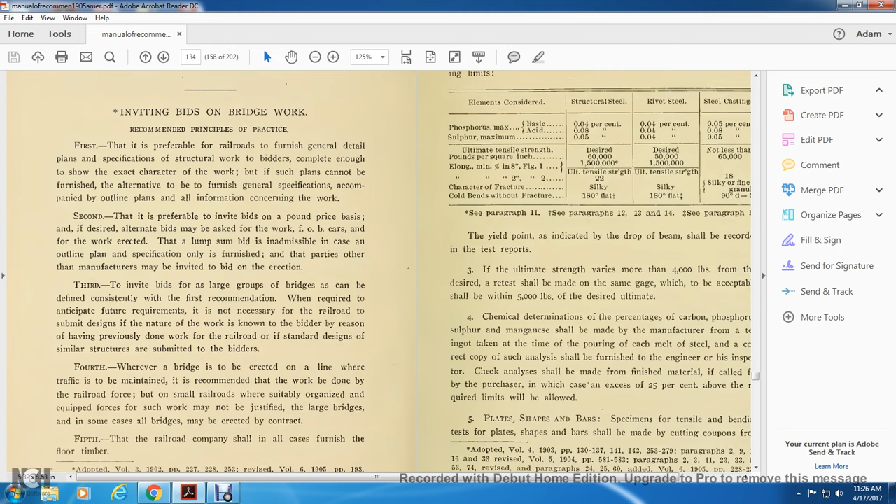Fourth, whenever the bridge is erected on a line where traffic is to be maintained, it is recommended that the work be done by the railroad. However, for small railroads, a suitable organization equipped for such work may not be justified. Large bridges, and in some cases all bridges, may be erected by contract. Fifth, the railroad company shall in all cases furnish the floor timber.

General specification for iron and steel structures: material and workmanship of steel structures. Material. Steel shall be made by the open hearth process, and the chemical and physical properties shall conform with the following limits. Elements considered for structural steel, rivets, and steel castings: phosphorus maximum, sulfur maximum, ultimate tensile strength in pounds per square inch, elongation percentage in 8 inches and 2 inches, character of the fracture, cold bend without fracture.

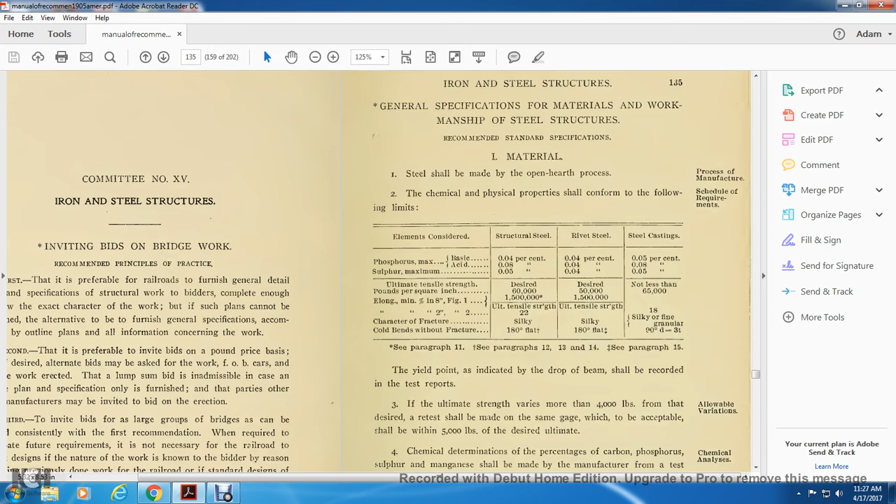The yield point shall be indicated by the drop of the beam, and it shall be recorded in the test reports. If the ultimate strength varies more than 4,000 pounds from the desired result, a retest shall be made with the same gauge, for which the acceptable variation shall be 5,000 pounds from the desired ultimate. The chemical determination of the percentages of carbon, phosphorus, sulfur, and manganese shall be made by the manufacturer from a test ingot taken at the time of pouring of each melt of steel, and a correct copy of such analysis shall be furnished to the engineer or his inspector. Check analyses shall be made from the finished material if called for by the purchaser, in which an excess of 25% above the required limits is allowed.

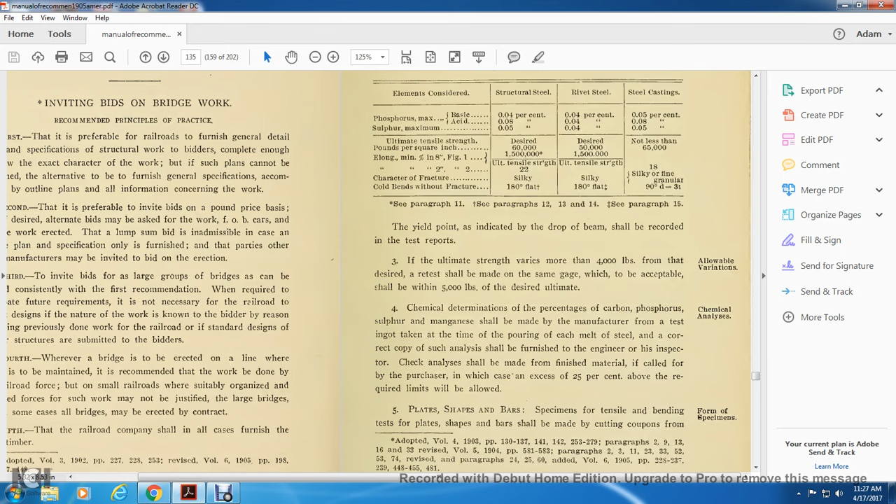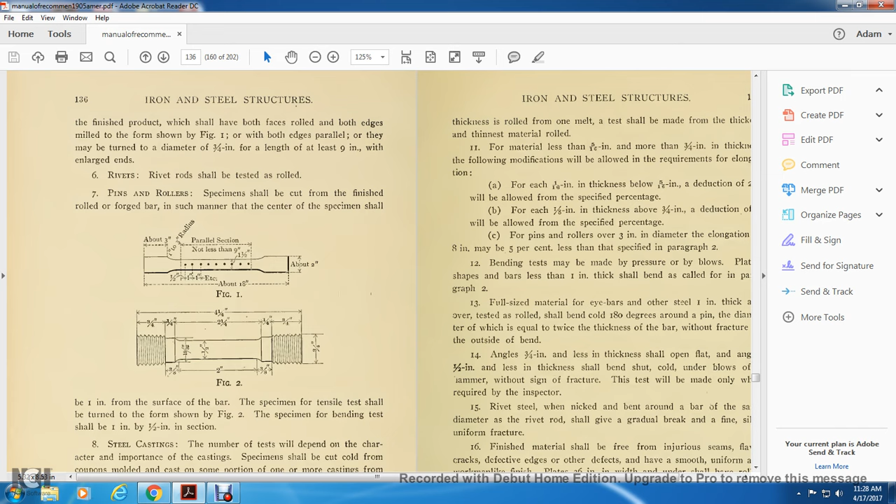Plates, shapes and bars. Specimens for tensile and bending tests for plates, shapes and bars shall be made by cutting coupons from the finished product, which shall have both faces rolled and both edges milled, as shown in figure 1. Bar specimens may be turned to a diameter of 3/4 of an inch for a length of at least 9 inches, with enlarged ends. Rivet rods should be tested as rolled. For pins and rollers, the specimen should be cut from the finished rolled or forged bar in such a manner that the center of the specimen shall be 1 inch from the surface of the bar. The tensile test specimen shall be turned to the form shown in figure 2. The bending test specimen shall be 1 inch by 1/2 inch in section.

Steel castings. The number of tests will depend on the character and importance of the castings. Specimens shall be cut cold from coupons molded and cast on some portion of one or more castings from each melt, or from the sink heads, if the heads are of sufficient size. The coupon or sink head shall remain on the casting until annealed, before cutting off the test specimens, which shall be as prescribed for pins and rollers.

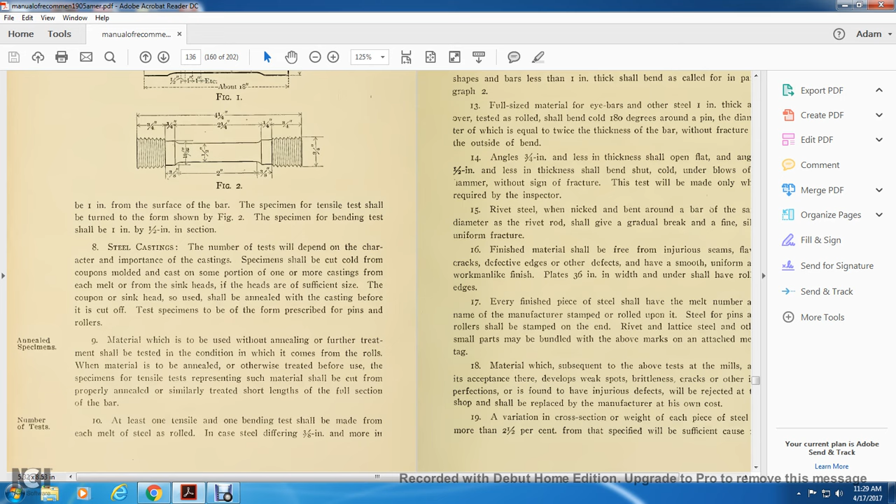Annealed specimens. Material which is to be used without annealing or further treatment should be tested in the condition in which it comes from the rolls. When the material is to be annealed or otherwise treated before use, the specimens for tensile tests representing such material should be cut from properly annealed or similarly treated short lengths of the full section of the bar. Number of tests: at least 1 tensile and 1 bending test shall be made from each melt of steel as rolled, in case the steel differs 3/8 of an inch or more in thickness.

Thickness is rolled. One melt, a test should be made from the thickest and thinnest of material rolled. For material less than 5/16 of an inch and more than 3/4 of an inch in thickness, the following modification will be allowed with requirements of elongation.

For each 1/16 of an inch thickness below 5/16 of an inch, a deduction of 2.5 will be allowed, specified from percentage per inch. For each 1/8 of an inch thickness above 3/4 of an inch, 1 will be allowed for the specified percentage. For pins and rollers over 3 inches in diameter, elongation of 8 inches may be 5% less than specified in paragraph 2.

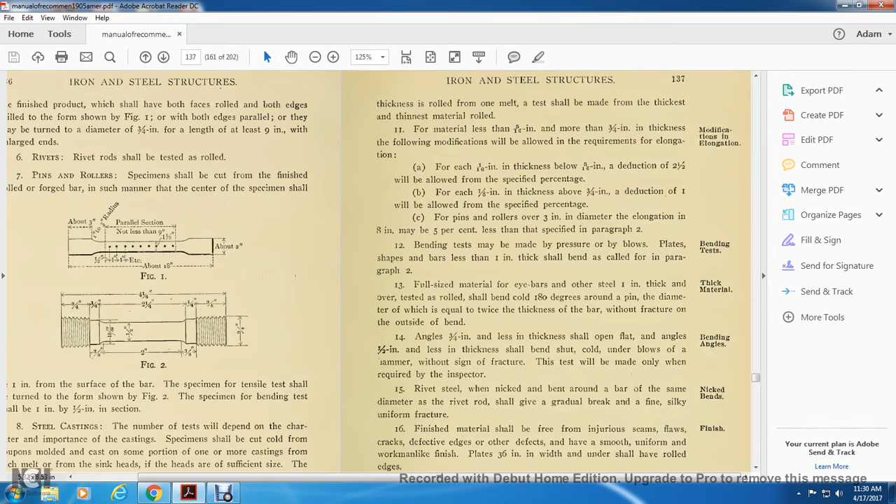Full-size material for eye bars and other steel, 1 inch thick and over, tested rolled, shall be bent 180 degrees around a pin with a diameter equal to twice the thickness of the bar, with no fracture on the outside of the bend.

Angles 3/4 of an inch or less in thickness shall open flat; angles within 1/2 inch of the thickness shall be bent shut cold under the blow of a hammer without sign of fracture. The test will be made only when required by the inspector.

Rivet steel, when nicked and bent around a bar of the same diameter as the rivet rod, shall give a gradual break and show a fine, silky, uniform fracture.

Finished material shall be free from injurious seams, flaws, cracks, and defective edges, or other defects, and shall be smoothly uniform with a workmanlike finish.

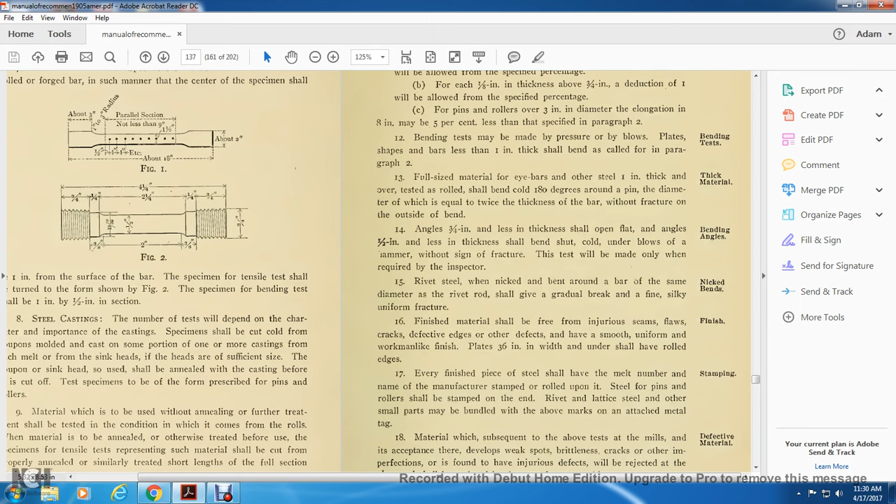But plates 36 inches in width and under shall be rolled with rolled edges.

Stamping: every finished piece of steel shall have the melt number and name of the manufacturer stamped on it or rolled upon it. The ends of pins and rollers should be stamped on the end. Rivets, lattice, and other small parts may be bundled with marks of attachment by metal tag.

Material showing subsequent to the mill tests and acceptance, developed weak spots, brittleness, cracks, or other imperfections found to have injuries or defects, will be rejected at the shop and shall be replaced by the manufacturer at its own cost.

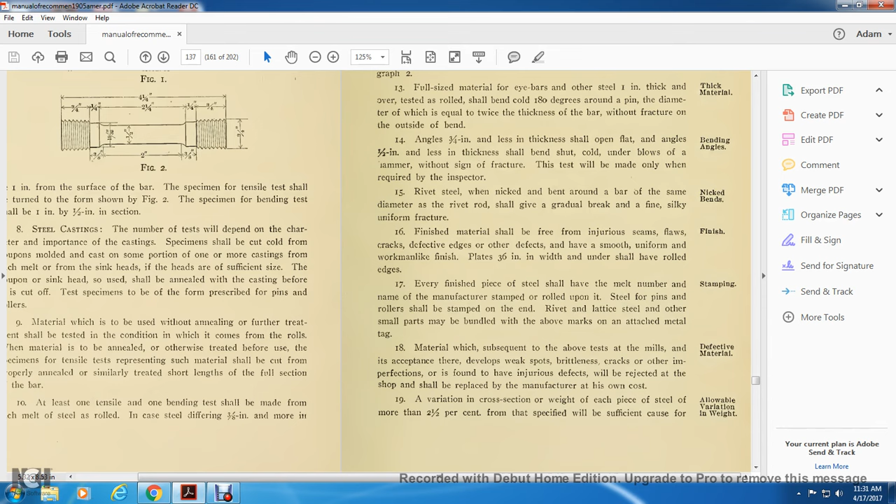A variation in cross-section weight of each piece of steel of more than 2.5% from the specified is sufficient to cause rejection, except in the case of sheared plates, which will be covered by the following permissible variations, which are applied to single plates.

When ordered by weight: plates of 12.5 pounds per square foot or heavier, up to 100 inches wide, 2.5% above and below the prescribed weight; 100 inches wide and over, 5% above or below. Plates under 12.5 pounds per square foot, up to 75 inches wide, 2.5% below; 75 up to 100 inches wide, 5% above or 3% below; 100 inches wide and over, 10% above or 3% below.

When ordered to gauge, plates will be accepted if measured not more than 1/100th of an inch below the ordered thickness, and an excess over the nominal weight corresponding to the dimensions ordered will be allowed to each plate, no more than shown in the following table.

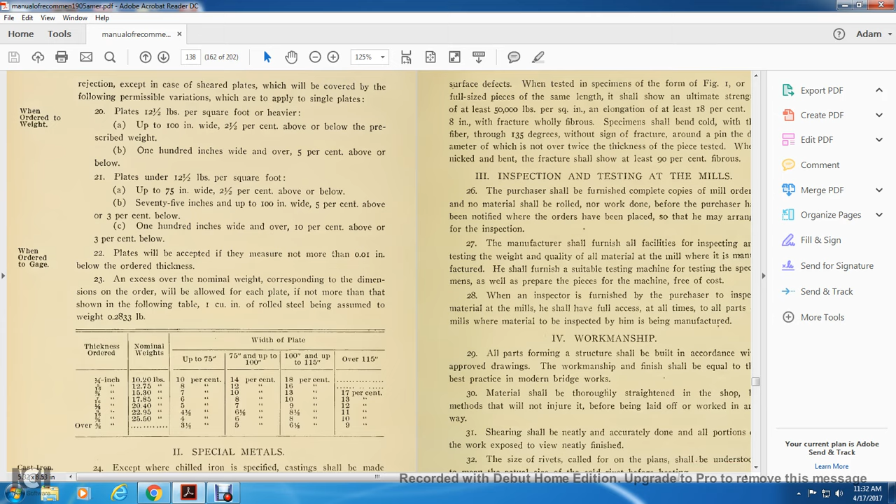One cubic inch of rolled steel may be assumed to weigh 0.2833 pounds. This table shows the thickness ordered, the width, and nominal weights: up to 75 inches, 75 to 100 inches, 100 to 115 inches, and over 115 inches width of plate.

Special metals, cast iron. Except where chilled iron is specified, castings shall be made with tough gray iron, containing not more than 0.10 (one tenth of one percent) combined. They shall be true to pattern, out of wind, and free from flaws.

Except where a shrinkage test is demanded, the test shall be made on an arbitration bar with the American Society for Testing Materials, a round bar of 1 1/4 inch diameter to 15 inches long. The transverse test should be made with a support length of 12 inches, with a load at the middle, with the minimum breaking load applied of 2,900 pounds, and a deflection of at least 1/16 of an inch before rupture.

Wrought iron flat bar. The wrought iron should be doubled and rolled thoroughly, the fibers uniform in character, thoroughly welded and rolled, and free from surface defects.

The test specimen, with a form of nick at one end, full size piece with the same length, shall show an ultimate strength of at least 50,000 pounds per square inch, an elongation of at least 18% in 8 inches, with the fracture wholly fibrous.

The specimen shall be bent cold until the fiber is at 135 degrees without showing sign of fracture, around a pin of diameter not over twice the thickness of the piece tested; when nicked and bent, the fracture must show at least 90% fibrous structure.

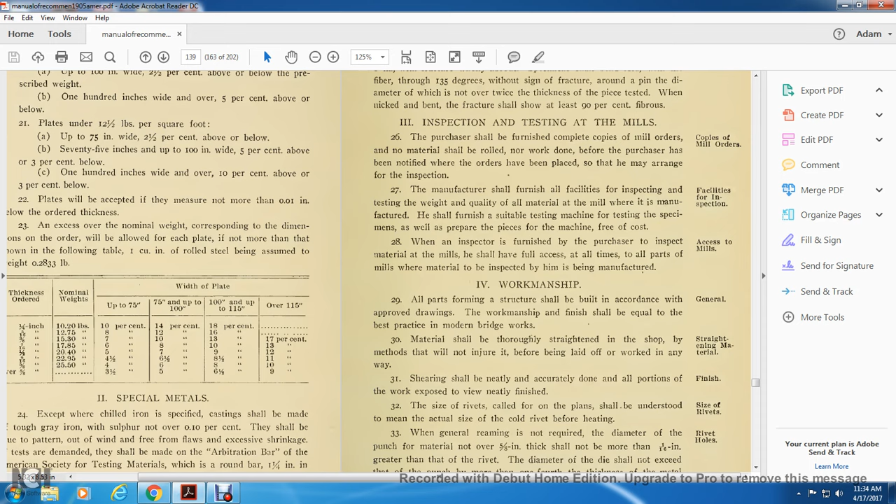They shall furnish suitable testing machines and prepare the test specimens and test pieces free of cost. When an inspector is furnished by the purchaser for inspecting material at the mill, he shall have full access at all times to all parts of the mill where the material is being manufactured.

Workmanship, general. All parts of the structure forming the work shall be built in accordance with the approved drawings. The workmanship and finish shall be equal to the best practice of modern bridge works.

Straightening material. Material shall be thoroughly straightened in the shop by methods that will not injure it, before being laid off or worked in any way.

Finish. Shearing shall be neatly and accurately done, with all portions of the work exposed to view finished. Regarding the size of the rivet heads: when called for on the plans, it should be understood to mean the actual size of the cold rivet before heating.

Rivet holes. When general reaming is not required, the diameter of the punch for material not over 5/8 of an inch shall be not more than 1/16 of an inch greater than that of the rivet. The diameter of the die shall not exceed the punch by more than 1/4 the thickness of the metal punched, for material over 5/8 of an inch thick, except for minor details.

All material that requires general reaming shall be sub-punched and reamed as per paragraph 62, or drilled from the solid. Holes in flange rolled beams and channels in floors of railroad bridges shall be drilled, or drilled from the solid; holes in webs shall likewise be drilled or sub-punched and reamed.

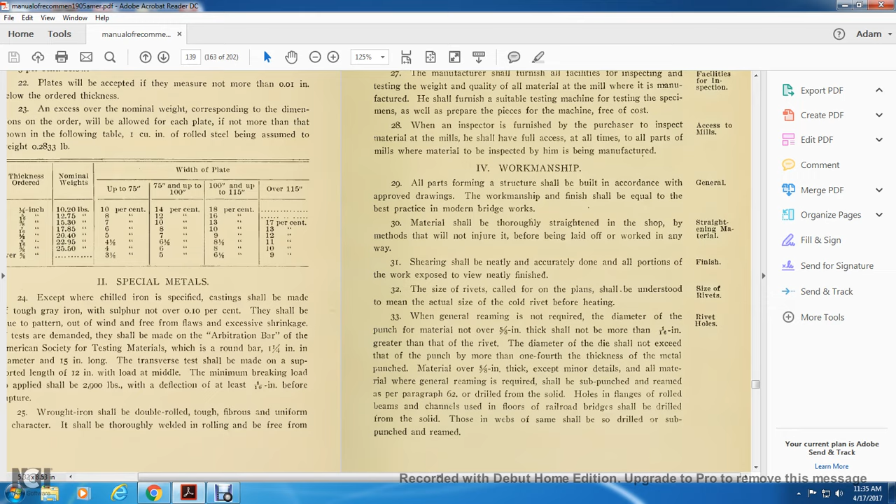Punching shall be accurately done, with only slight inaccuracy allowed. Mismatching of holes may be corrected by reaming; drifting to enlarge unfair holes will not be allowed. Poor matching of holes shall be cause for rejection at the option of the inspector.

All riveted members shall have all parts pinned up firmly and joined together, with bolts or rivets, before riveting is commenced, and with surfaces to be painted so treated.

Lattice bars. Lattice bars shall have neatly rounded ends unless otherwise called for.

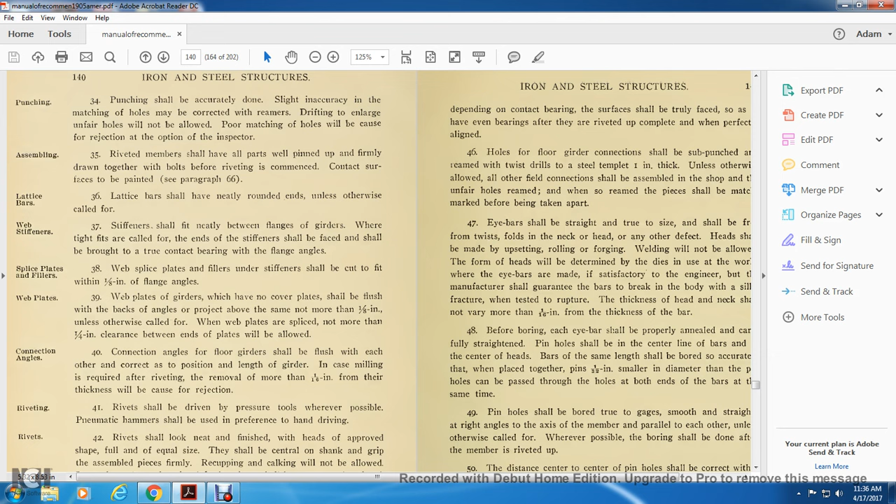Splice plates and fillers. Web splice plates and fillers under stiffeners shall be cut to fit within 1/8 of an inch of the flange angles. Web plates of girders which have no cover plates shall project above the back of the angle more than 1/8 of an inch, and unless otherwise called for, when plates are spliced, not more than 1/4 of an inch clearance between the ends of the plates will be allowed.

Connection angles. Connection angles for floor girders shall be flush with each other, with corrective adjustment as needed over the length of the girder; in case milling is required after riveting, removal of more than 1/16 of an inch from their thickness shall cause rejection.

Turned bolts: whenever bolts are used in place of rivets where subjected to shear, the hole shall be reamed parallel and the bolts turned to a driving fit. A washer not less than 1/4 inch in thickness shall be used under the nut.

Members shall be straightened. Where several pieces form one built member, they should be straight and fit closely together. Finished members should be free from twists, bends, and open joints.

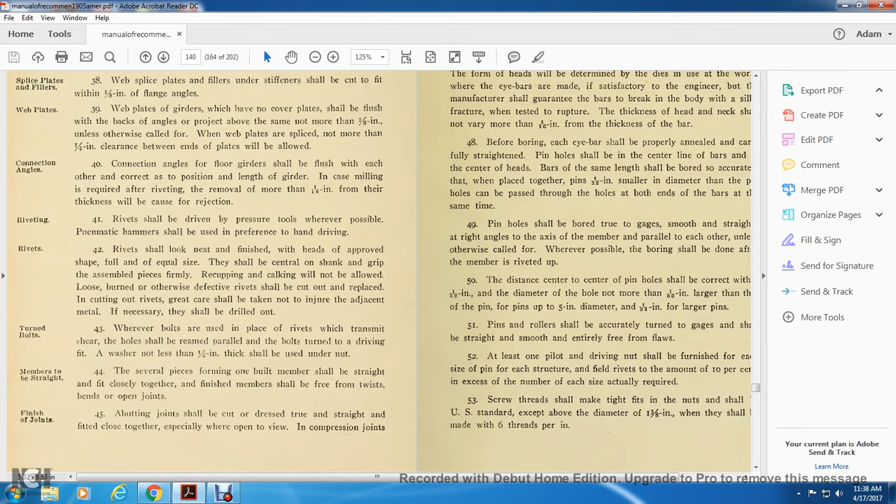Compression joints: depending on contact bearing of the surfaces, they should be truly faced so as to have even bearing, and when riveted up and complete they should be perfectly aligned.

Field connections: holes for floor girder connections shall be sub-punched and reamed with a twist drill and steel template 1 inch thick, or the field connections shall be assembled in the shop with an even, fair hole for reaming. When reamed, the pieces shall be match-marked before being taken apart.

The thickness of the head or neck shall not be more than 1/16 of an inch from the thickness of the bar. Boring eye bars.

Before boring, each of the eye bars shall be properly annealed and carefully straightened. Pin holes shall be in the center line of the bar and centered in the head. Bars of the same length shall be bored accurately so that when placed together, pins 1/32 of an inch smaller in diameter can be passed through the pin holes at both ends of the bar at the same time.

Pin holes shall be bored true to gauge, smooth and straight, at right angles to the axis of the member and parallel to each other, unless otherwise called for. Whenever possible, boring shall be done after the member is riveted up.

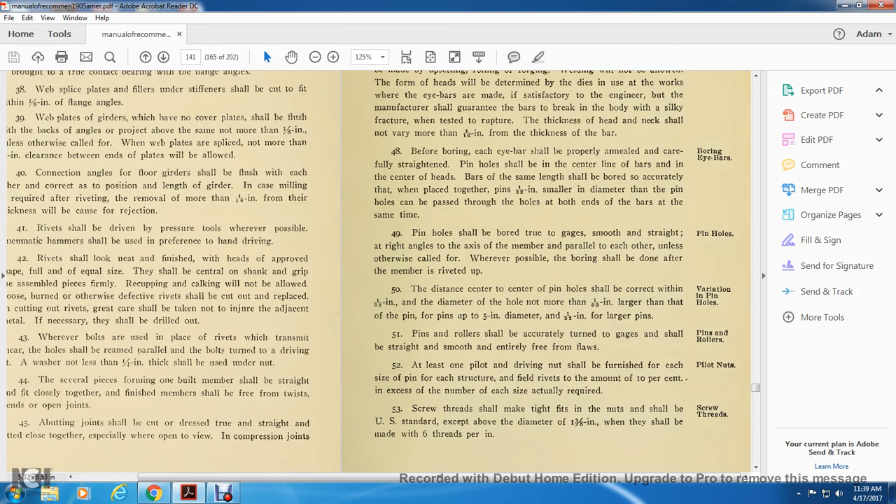Pins and rollers should be accurately turned to gauge and shall be straight, smooth, and entirely free from flaws. At least one pilot and one driving nut should be furnished for each size of pin for each structure, and field rivets should number about 10% in excess of the number actually required on each side.

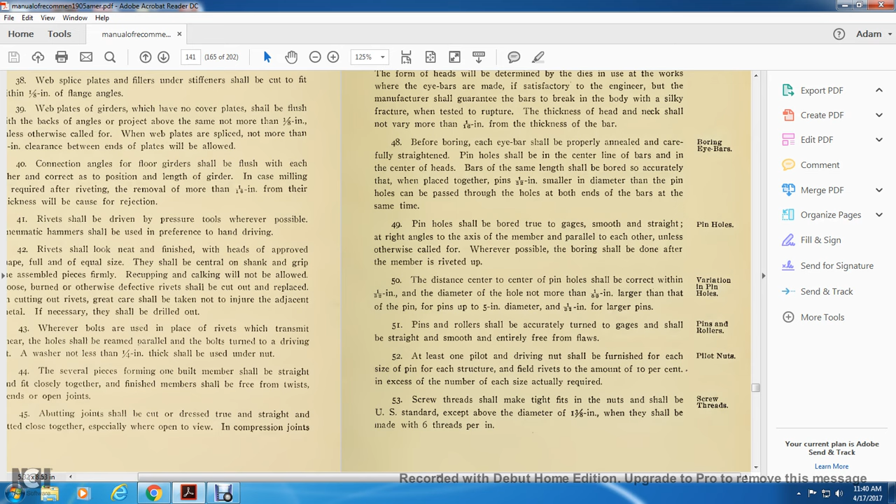Screw threads: screw threads should make tight fits in the nuts and shall be U.S. standard, except for diameters above 1 inch and 3/8 of an inch, which shall be made with 6 threads per inch.

Annealing. Steel, except for the minor details, which has been partially heated shall be properly annealed. All steel castings shall be annealed. Welded steel will not be allowed. Expansion of the bed plates shall be planed true and smooth. Cast wall plates shall be planed top and bottom, the cut of the planing tool should correspond with the direction of the expansion.

Shipping details: pins, nuts, bolts, rivets, and other small details should be boxed or crated. The weight of every piece and box shall be marked on it in plain figures. Finished weight. The payment of the pound price contract shall be by scale weight, and no allowance over 2% of the total weight of the structure per the plans will be allowed for excess weight.

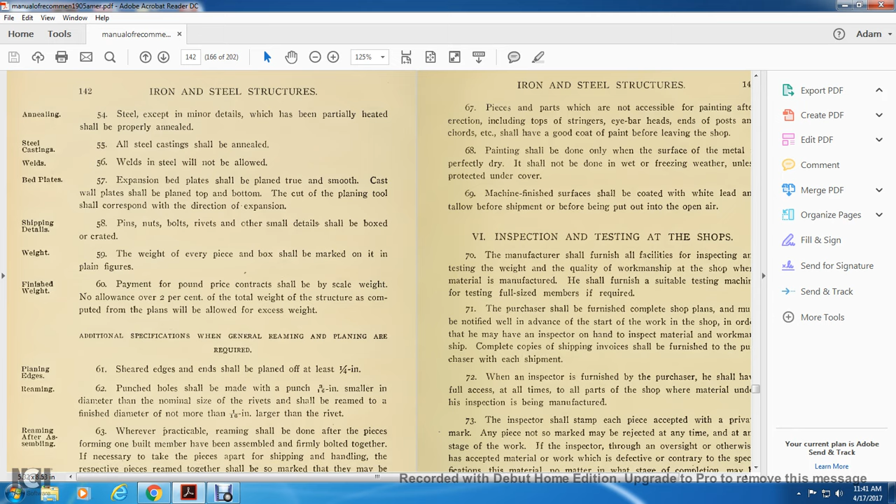Alright, and additional specifications: general reaming and planing are required. 61. Sheared edges shall be planed off at least 1/4 inch. Punched holes shall be made with a punch 1/16 of an inch smaller than the nominal size of the rivets and shall be reamed to a finished diameter not more than 1/16 inch larger than the rivet. Reaming after assembling: whenever practical, the reaming shall be done with the pieces assembled and firmly bolted together.

If it is necessary to take the pieces apart for shipping and handling, the respective pieces reamed together shall be marked so that they may be reassembled in the same position. Final setting up. No interchange of the reamed parts will be allowed. Removing burrs: burrs on all the reamed holes shall be removed with a tool, countersinking 1/16 of an inch.

5. Shop painting. Steel work before leaving the shop shall be thoroughly cleaned and given one good coat of pure linseed oil or paint, which may also be called for, well worked into all joints and open spaces. 66. Riveted work. The surfaces coming in contact shall each be painted before being riveted together. Pieces and parts which are not accessible to paint after erection, including tops of stringers, eye bar heads, and ends of posts and chords, shall be coated with paint before leaving the shop.

The painting shall be done only when the surface of the metal perfectly dry. It shall not be done in freezing weather unless protected under cover. 69. Machine-finished surfaces shall be coated with white lead and tallow before shipment, before being put out into the open air.

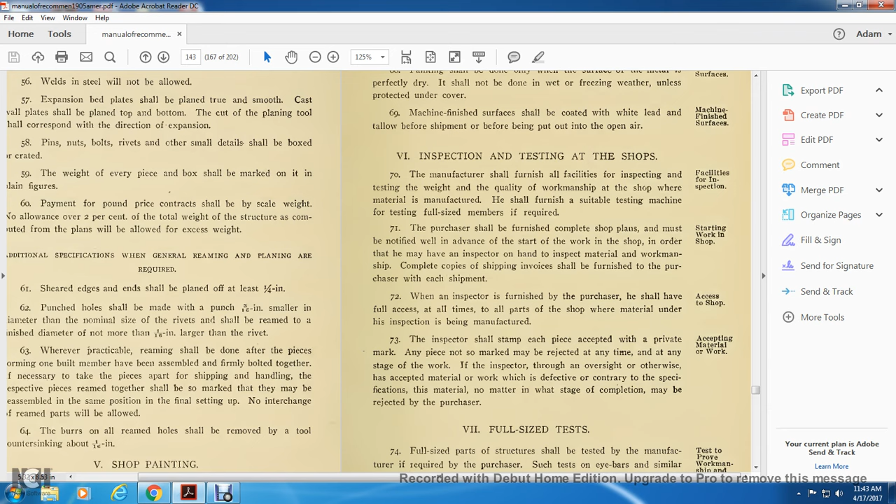Acceptance of the material and work. The inspector shall stamp each accepted piece with a private mark; pieces not so marked are rejected. At any stage of the work, material or work found defective or contrary to the specification, no matter what the stage of completion, may be rejected by the purchaser.

7. Full-size test. Full-size parts of the structure shall be tested by the manufacturer if required by the purchaser. Such tests of eye bars and similar members, to prove workmanship, shall be made at the manufacturer's expense and paid for by the purchaser at the contract price if the test is satisfactory. If the test is not satisfactory, the members represented by them will be rejected. The expense of testing members to prove their design shall be paid for by the purchaser.

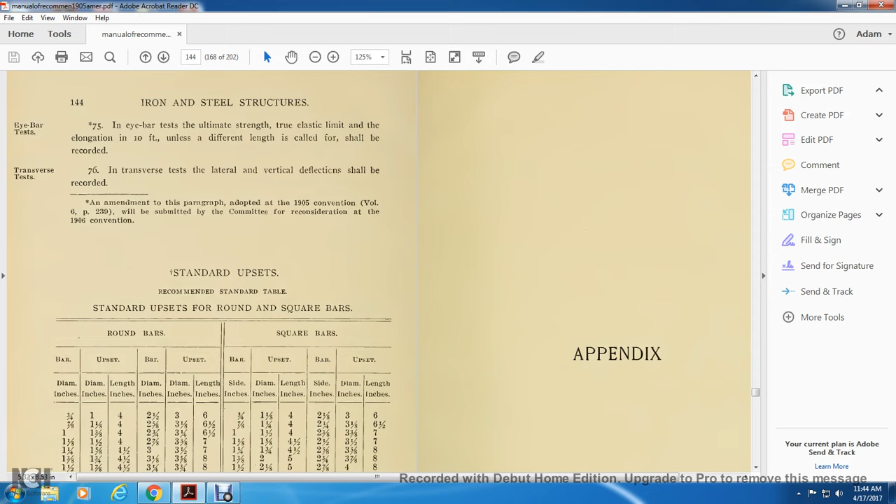Alright, 75, eye-bar test. In the eye-bar test, the ultimate strength, the true elastic limit, and the elongation in 10 feet, unless a different length is called for, shall be recorded. The transverse test: in the transverse test, lateral and vertical deflection shall be recorded. Then there are the standard upsets recommended in the standard table for round and square bars. Round bars are dimensioned in inches, with upsets for round bars and square bars.

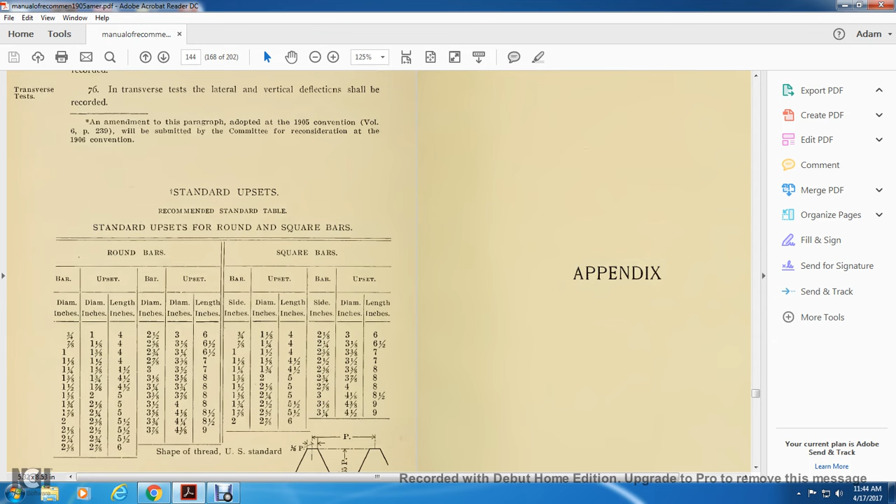An appendix. I'm just going to go over the appendix in like 1 minute after this video.